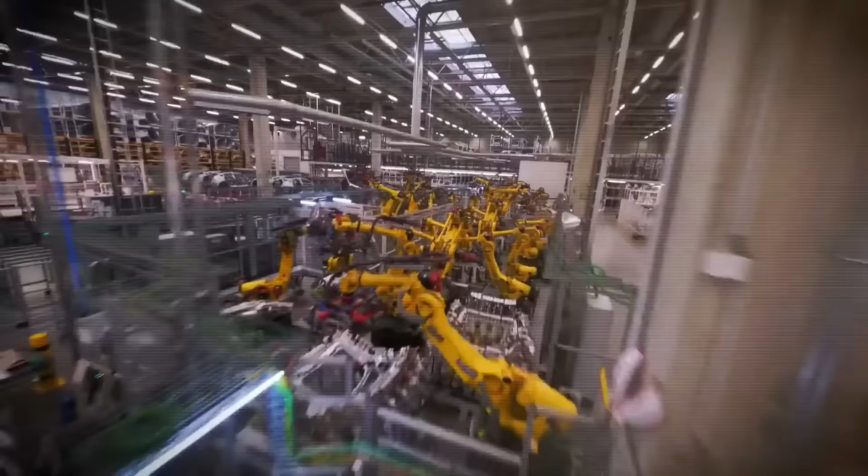Stop looking at the road. Stop staring at the Cybertruck. You think you're watching a car company at work? You're hallucinating. What if I told you the vehicles rolling off the line today are just Trojan horses? Decoys designed to distract you while the real weapon is assembled in the dark. You see the metal, you miss the monster.

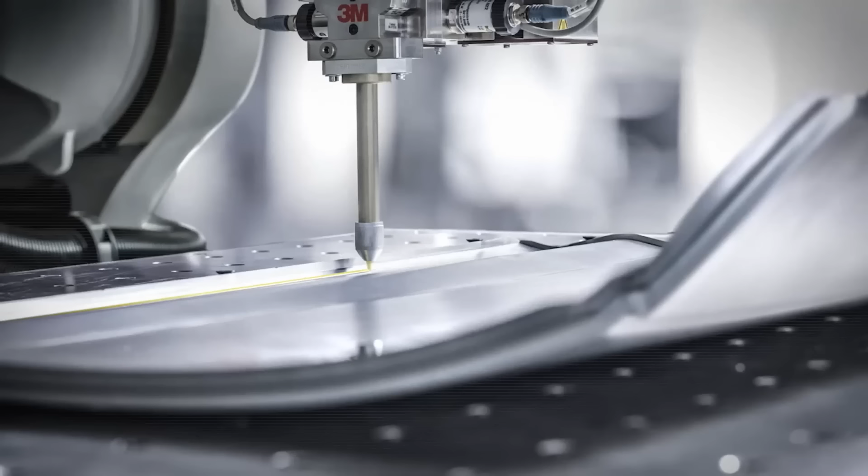It's late 2025. The legacy giants are bleeding billions, desperately trying to copy the Tesla of yesterday. They're tracing blueprints for an engine that doesn't matter anymore. Because while they were fighting for market share, Elon Musk wasn't just building a better car. He was building a machine to end the concept of a car company entirely.

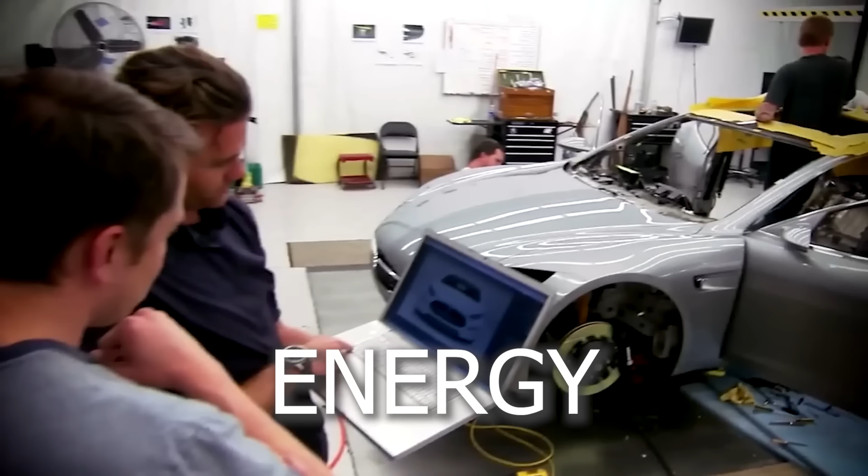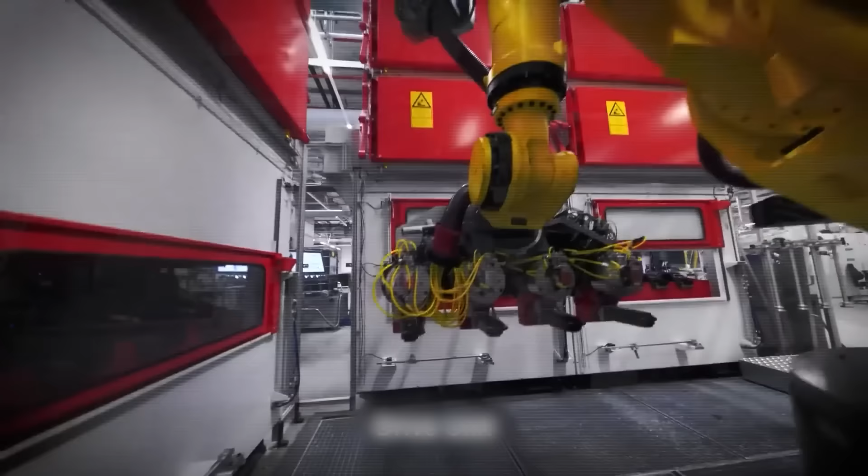We aren't talking about transportation anymore. We are talking about the total rewiring of reality, labor, energy, the very physics of how things are made. 5 hidden technologies, 5 keys to a kingdom the competition can't even see yet. This isn't an update. This is an extinction event for the old guard. You want to survive the shift? You need to understand the blueprint.

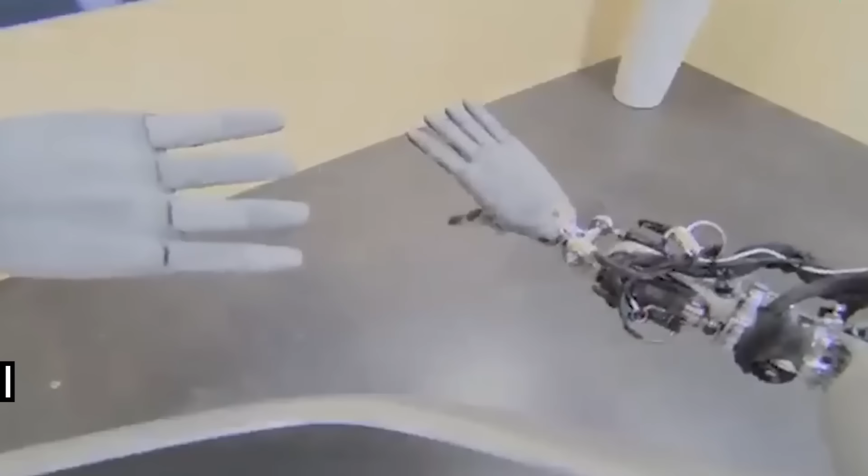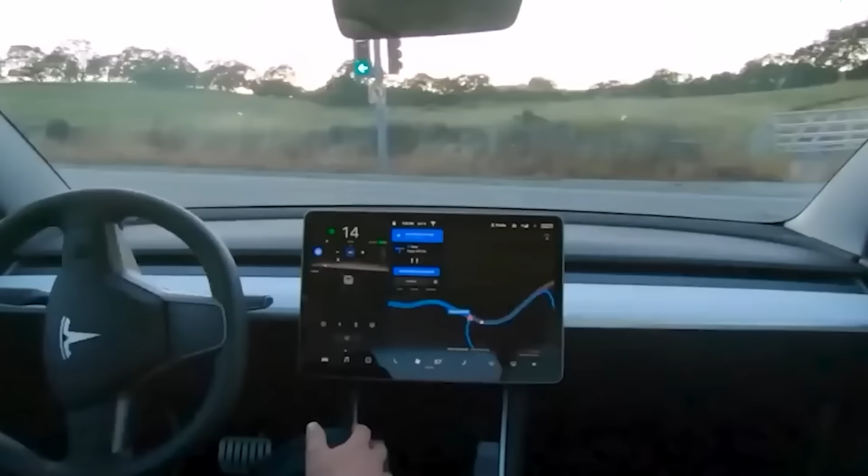Fourth, end-to-end AI, the brain that finally unlocks the robo-taxi. And fifth, Optimus, the humanoid that takes that intelligence and learns to walk. Alone, they disrupt. Together, they dominate. A fortress built to secure an insurmountable lead. Today, we deconstruct the stack, how it works, why it matters, and how this convergence changes everything.

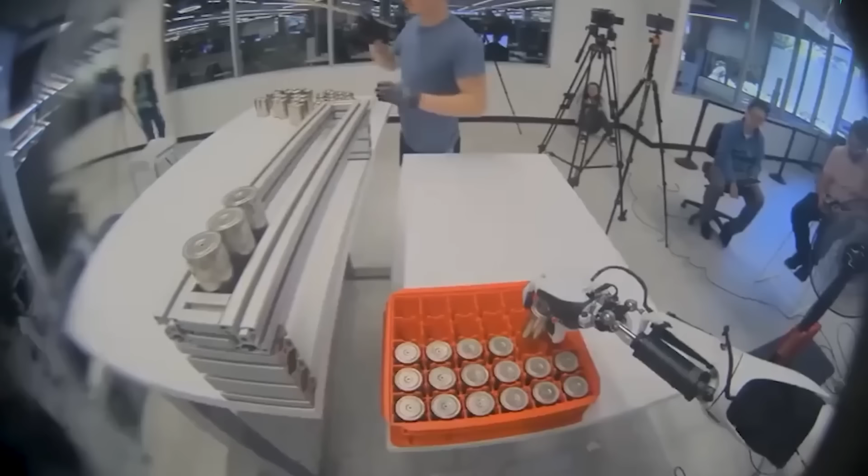Welcome to Dravexa. You need to understand, the deadliest weapon in Tesla's arsenal isn't a car, it's the factory. You've heard the mantra, the machine that builds the machine. But with the next-gen platform, that vision stops being a soundbite and starts being a reality. They call it Unboxed. For 100 years, Henry Ford's shadow ruled the floor.

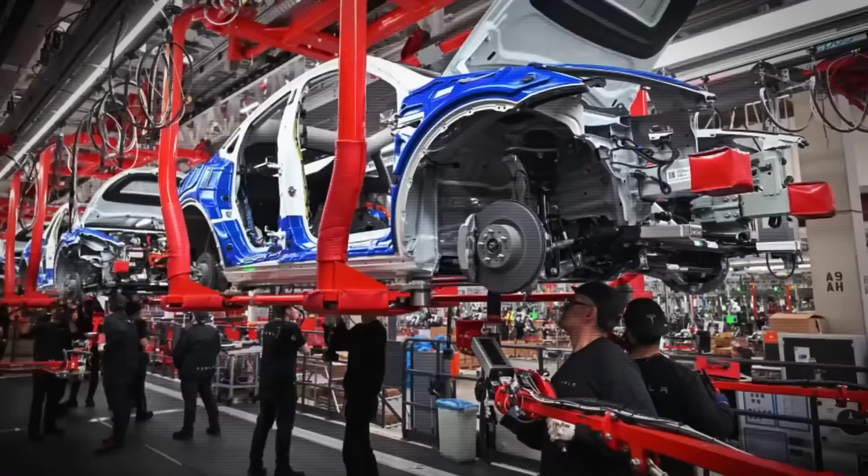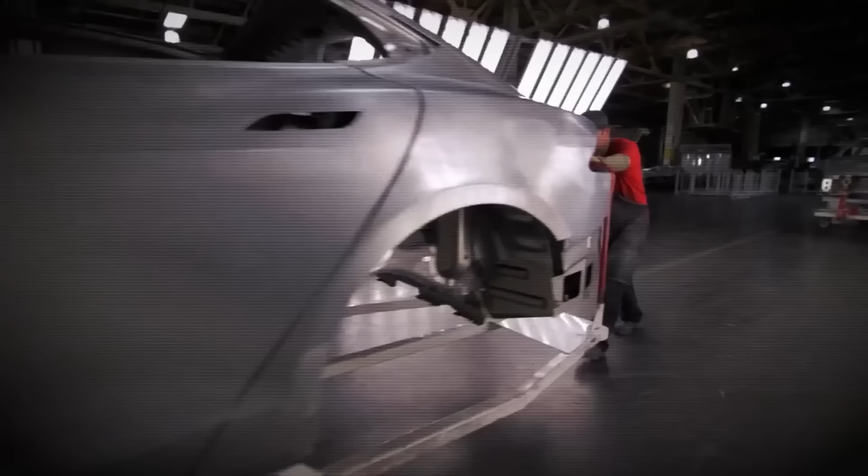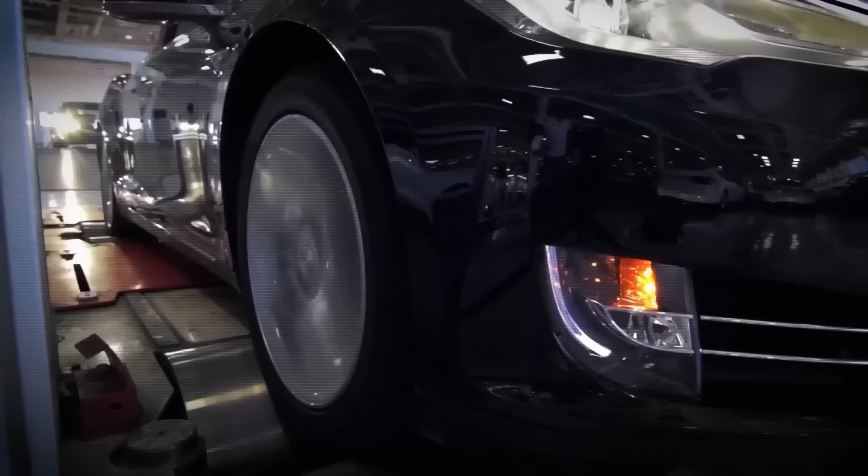The linear line, the body in white creeping down a single track, a swarm of robots and humans performing a cramped, clumsy dance, adding parts one by one. But that rhythm is broken. Think about it. The whole line is shackled to its slowest step, a total bottleneck. Workers fighting for space, diving inside the frame, wrestling with wires. It's inflexible. Retooling is a nightmare. It's slow, it's heavy, and frankly, it's obsolete.

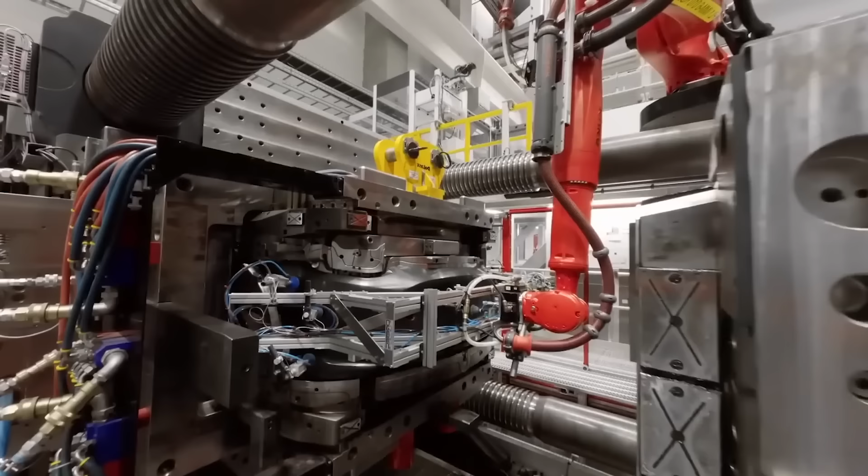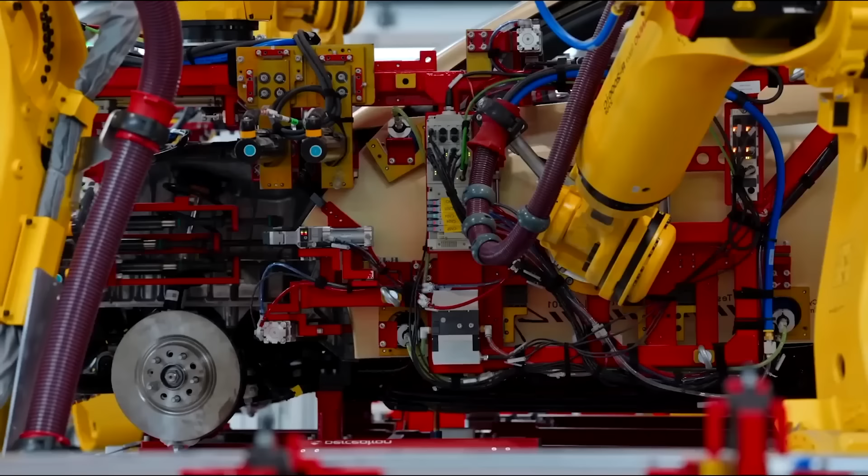So Tesla's unboxed method throws that entire 100-year-old concept in the trash. Instead of one long, slow line, the factory is organized into parallel process chunks. Think of it like building a Lego car. You'd never build the frame first and then try to stuff the little driver through the tiny window. It's absurd. You'd build the floor. You'd build the front block, the rear block, the cabin, and then, at the very end, you just click them all together. This is exactly what the unboxed process does.

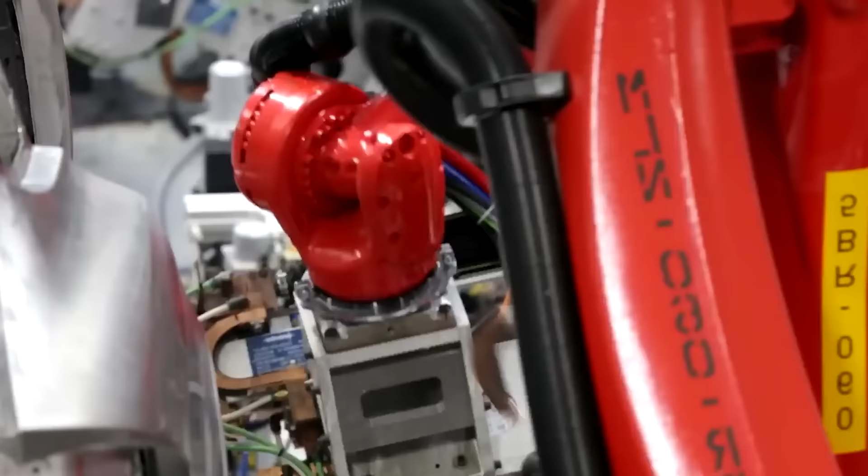Imagine this. Over in one corner of the factory, that massive front Giga casting is getting its motor, its suspension, its steering. At the exact same time, in another corner, the rear Giga casting is getting its motor. And simultaneously, the central floor pan, which is the 4680 structural battery pack, is being prepped.

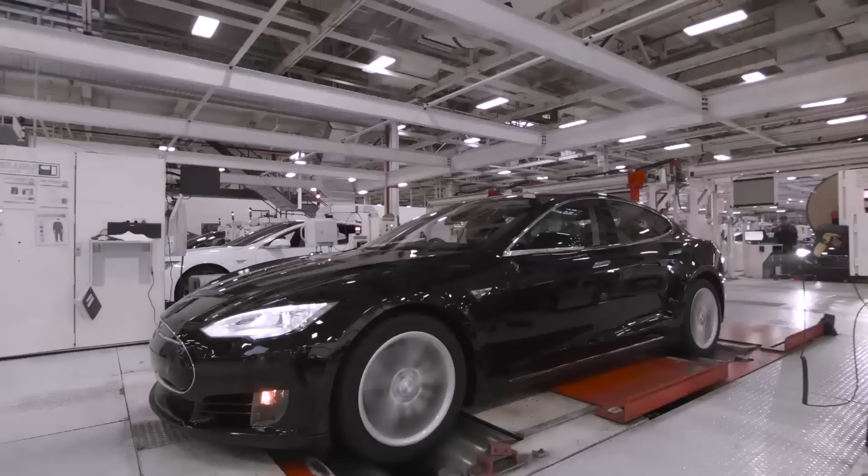The real magic? Open access. Workers and robots have a full 360-degree attack. You want to install a dashboard? It's simple. There's no roof. There are no doors in the way. It is massively faster. It's more ergonomic. Then, and only then, do these huge pre-assembled, pre-tested modules meet. The front, the rear, the painted side sections. They're all joined to that structural pack in one final step.

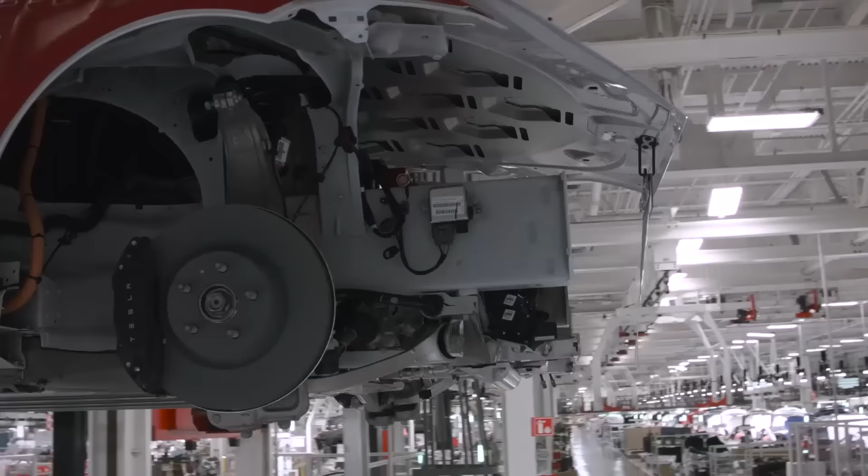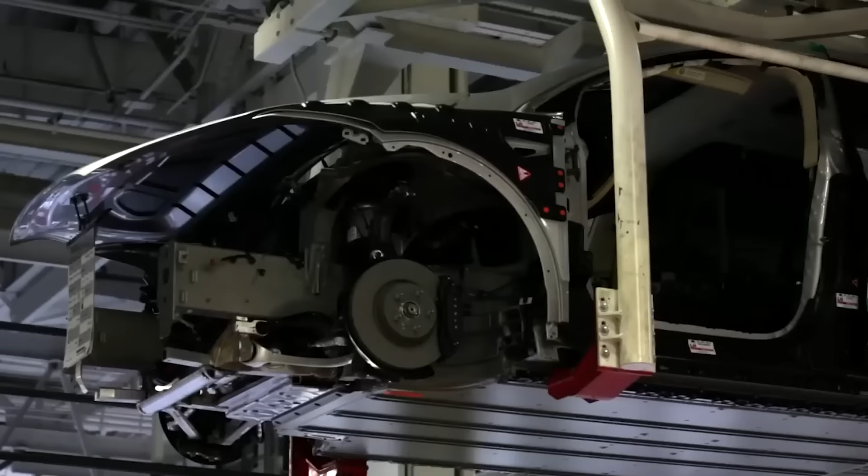The results? Tesla claims a staggering 40% reduction in factory footprint, a 25 to 30% increase in production speed, all while slashing the cost to build the factory in the first place. This isn't just an improvement, it's a new paradigm.

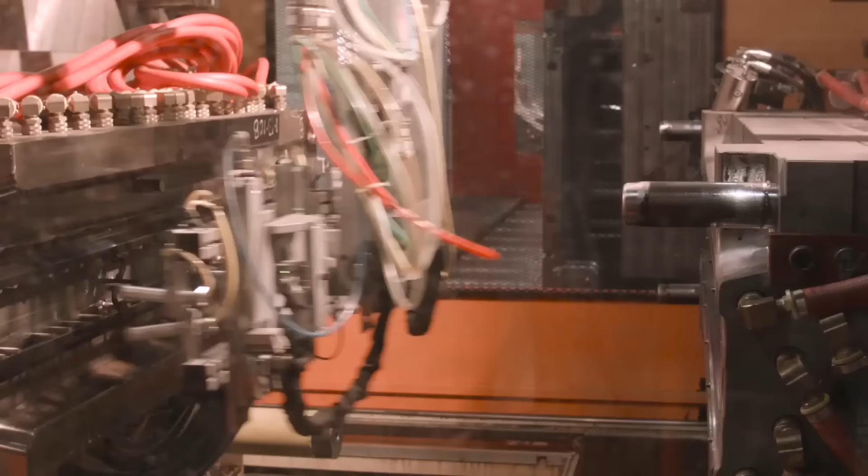This is the only way Tesla can realistically build that $25,000 car at high volume and, most importantly, at high margin. But here's the secret. That unboxed method, that whole Lego block strategy, is only possible because of another Tesla innovation, Giga casting. You have to understand, traditionally, a car's underbody is a complex puzzle. We're talking 70, 100, even more different stamped metal pieces.

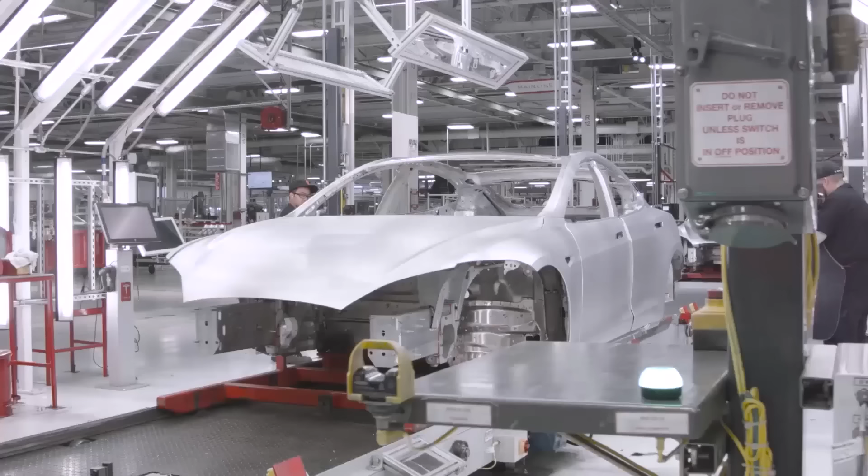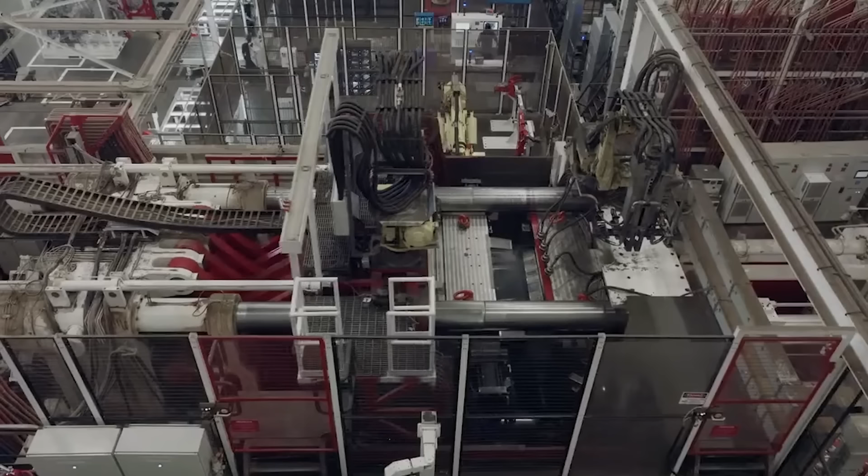All of them have to be painstakingly welded together by a massive body shop of hundreds and hundreds of robots. Tesla's Giga press, a machine the size of a small building, throws all that out. It casts the entire front or rear underbody as a single piece of aluminum. Just that one innovation, it eliminates over 300 robots.

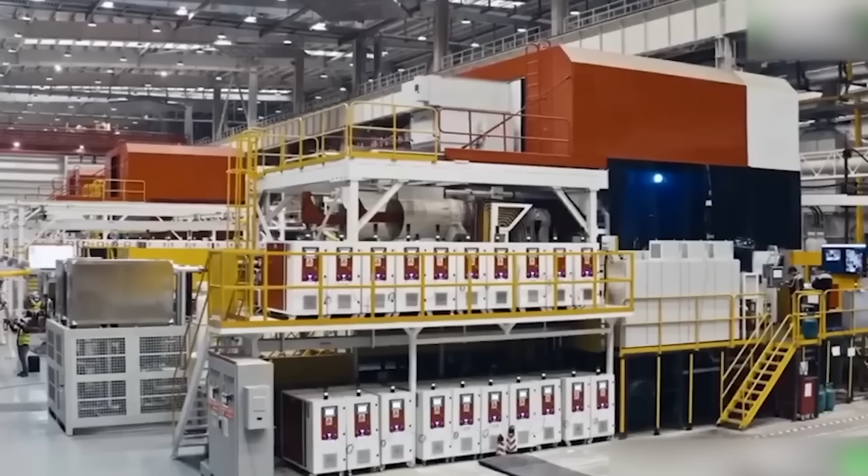It erases 600+ welds. It frees up a massive amount of factory space. The resulting part is stronger, it's lighter, and it is critically, unbelievably faster and cheaper to make. That single Giga part, that is the Lego block that the unboxed method is built on.

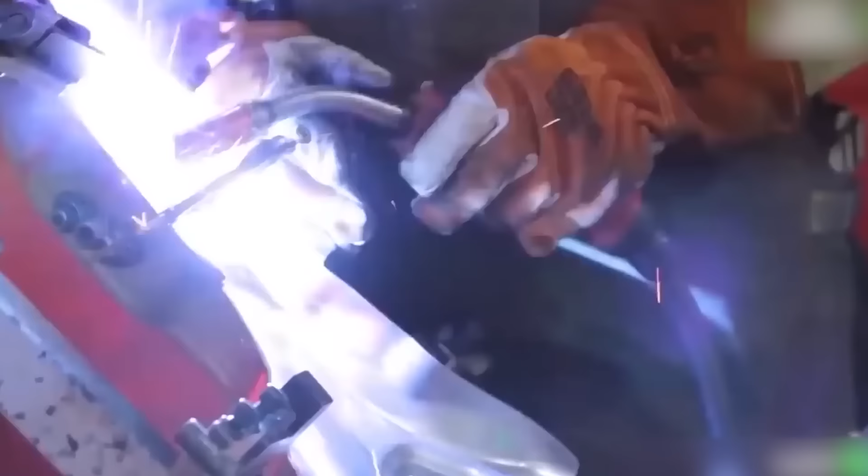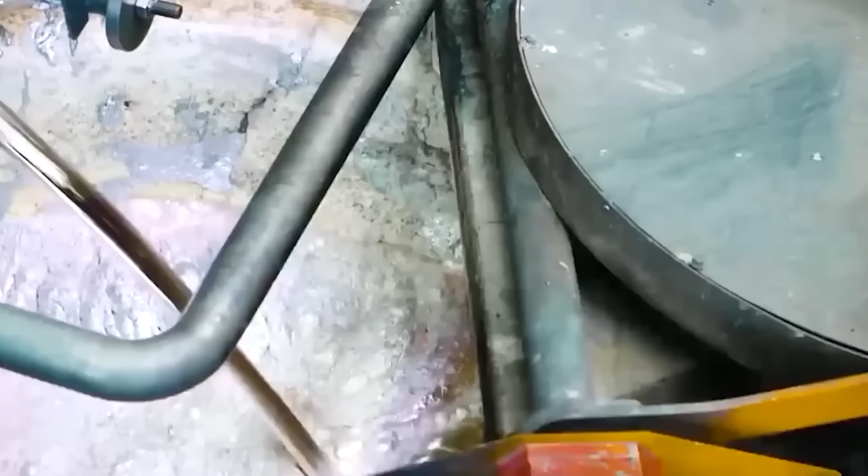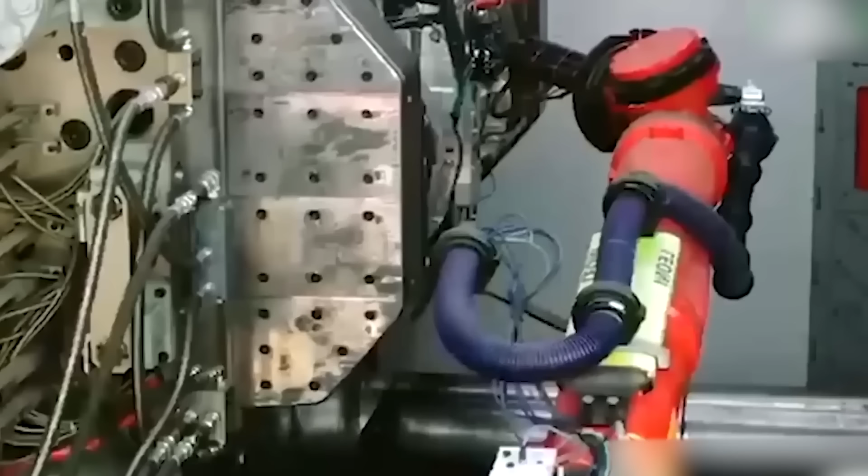While competitors are just now scrambling to order their first Giga presses, they're already years behind, because Tesla isn't just ahead in the machine, it has a multi-year lead in the metallurgy, the secret sauce, that special aluminum alloy that is strong, not brittle, and perfectly castable at high speed. That is a deep, costly moat. And for legacy automakers with their billion-dollar investments in those old-world body shops, crossing it might be impossible.

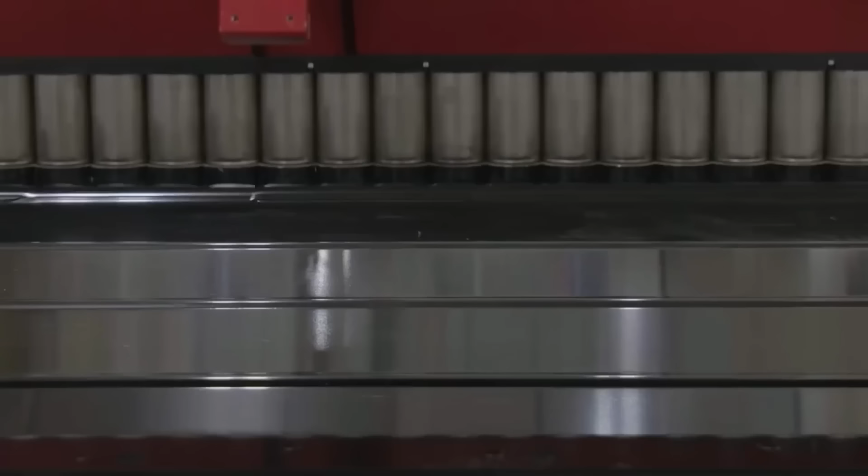So, you have the unboxed skeleton. Now, you need a nervous system. And for over 60 years, the entire auto industry has been locked into a dying standard, a 12-volt system. You have to understand, this 12-volt standard was designed for simple machines, a car with lights, a radio, and maybe power windows. But today, your car is a supercomputer on wheels, and that 12-volt system, it's become a critical bottleneck.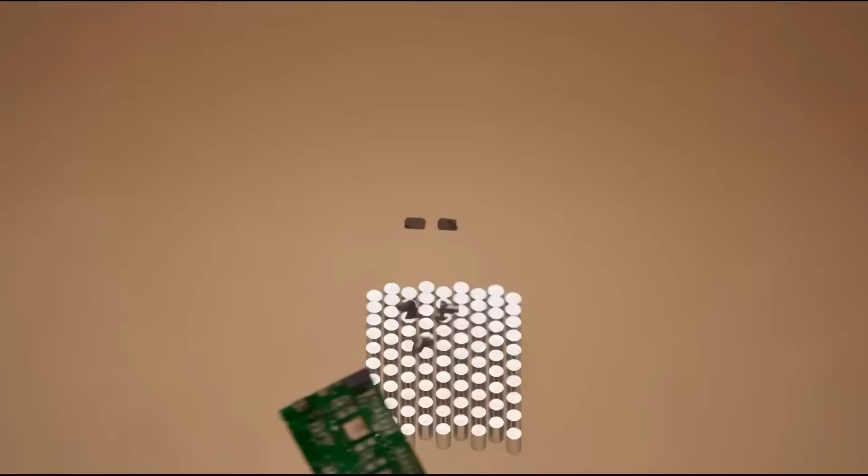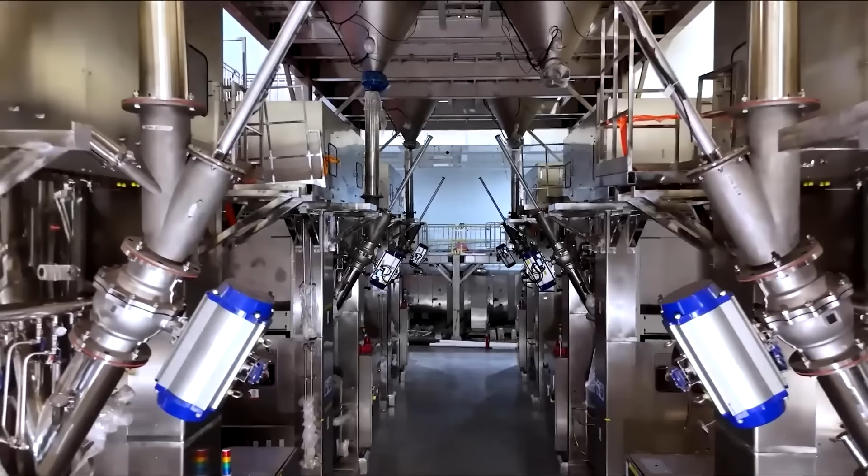The problem is just basic physics. You've heard the equation, power equals voltage times current. If you want more power, say for faster moving seats, a more powerful audio system, or the advanced steer-by-wire you see in the Cybertruck, you have to raise either the voltage or the current. And since the industry has been stuck at 12 volts, their only option was to drastically increase the current. The result? Thick, heavy, expensive copper wires to manage the heat and the load.

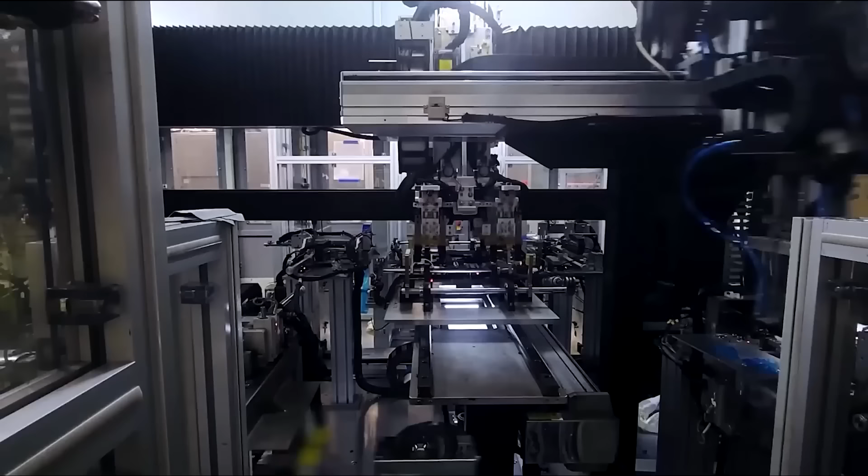We're talking about a wiring harness in a modern luxury car that can weigh over 50 kilograms. That's over 110 pounds. It's miles of copper. It's one of the most complex, costly, and manually installed parts in the entire vehicle. Worse, you hit a hard limit. You simply cannot run the high-power systems of the future on a 12-volt rail. Not efficiently, not safely. So, what does Tesla do?

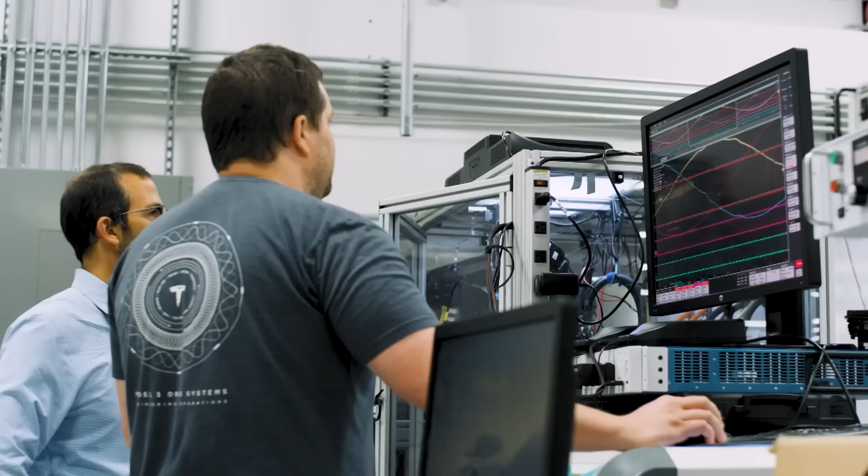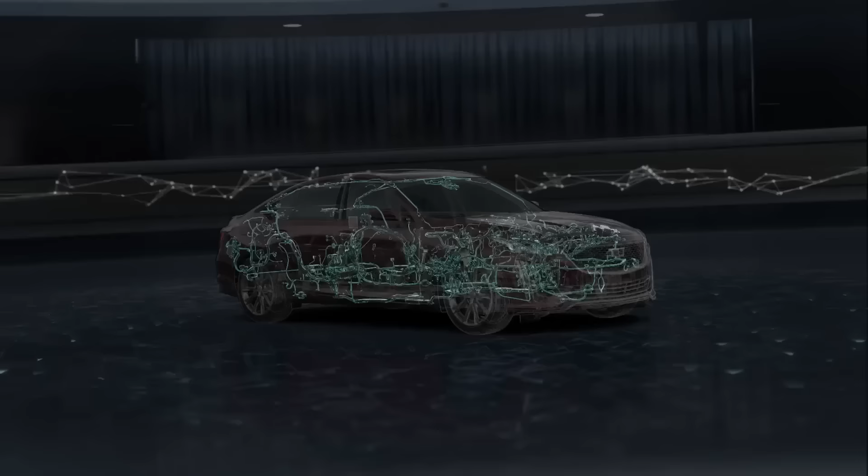They change the equation by moving to a 48-volt system, first in the Cybertruck and now standard on their next-gen platform. They flip the table. Think about it. To get the exact same amount of power, if you multiply the voltage by 4, you can divide the current by 4. That is a profound change. A 4 times reduction in current means you can use wires that are dramatically thinner, dramatically lighter, and dramatically cheaper.

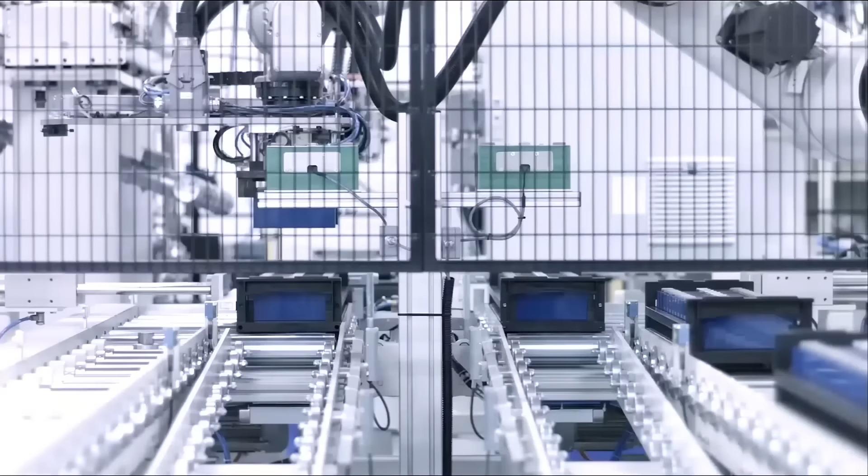And the power you lose as heat? That drops by a factor of 16. The Cybertruck's wiring harness is a fraction of the size of a normal truck's. This saves money, this reduces weight, which increases range, and it massively simplifies that unboxed manufacturing process we just talked about. It's the key that unlocks the Ethernet data bus, where a single cable can finally carry both power and data, destroying the one-wire per-function nightmare of the past.

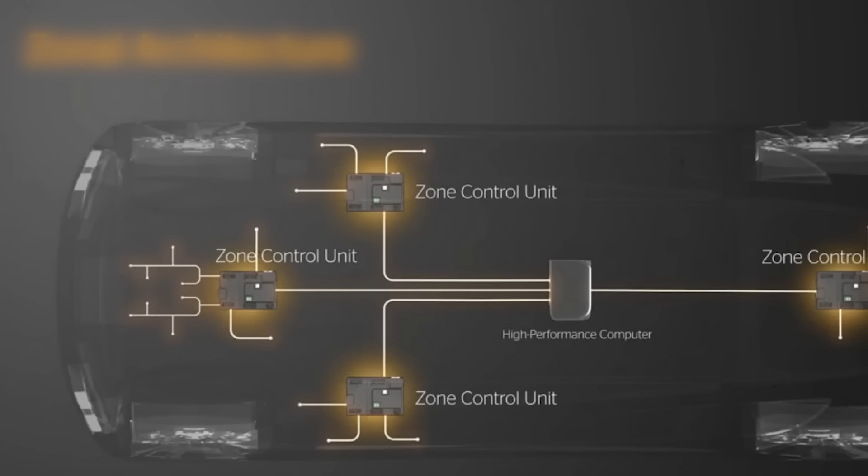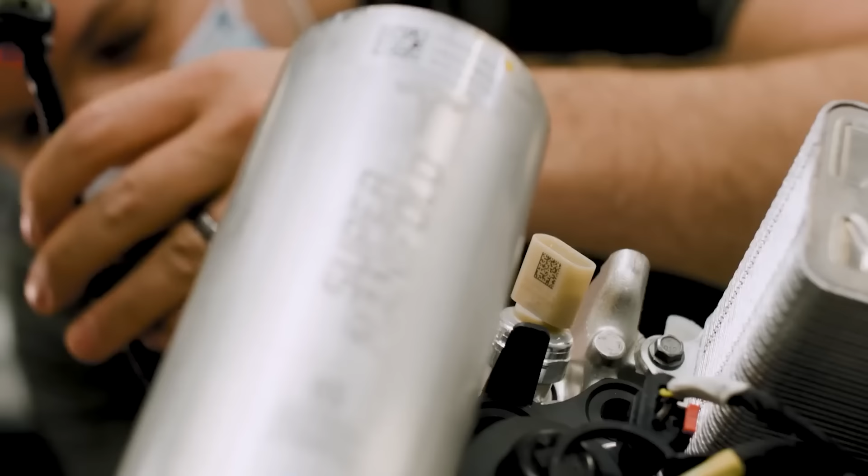This shift to 48 volts, it's not just an internal change, it is a shockwave to the entire global supply chain. For decades, companies like Bosch, Continental, and Denso have perfected the 12-volt world. All those window motors, the pumps, the fans, they are all 12-volt. By moving to 48 volts, Tesla is effectively making its entire parts list obsolete.

Suppliers now have to re-engineer, retool, and revalidate everything. A company like Ford or GM, they can't just switch. They are being held hostage by a supply chain that simply isn't ready. But Tesla? Because they designed so many of their own controllers, their own components, they can force the change. Their vertical integration lets them absorb the complexity. While their competitors, they're left tethered to a 60-year-old standard, adding yet another layer to Tesla's massive manufacturing and cost advantage.

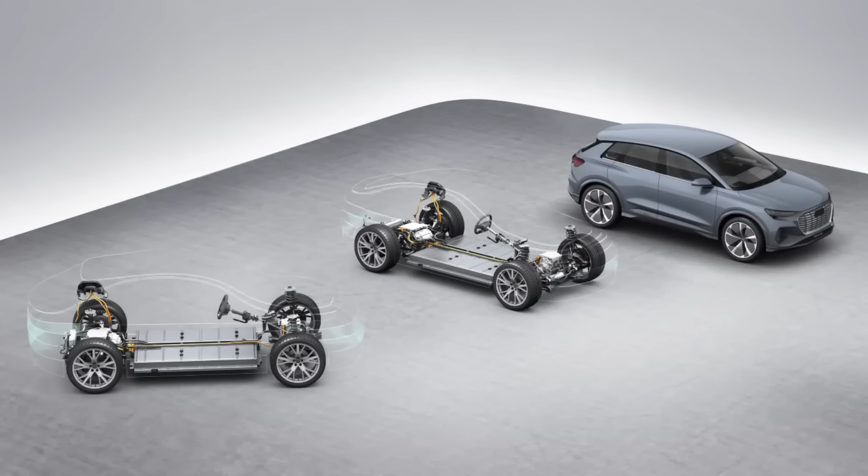So, your factory is fast, your car's nervous system is efficient, but you still have a massive problem. Energy. The car still needs a breakthrough to be affordable for everyone. And that breakthrough is the 4680 battery cell. The name? It's just the dimensions.

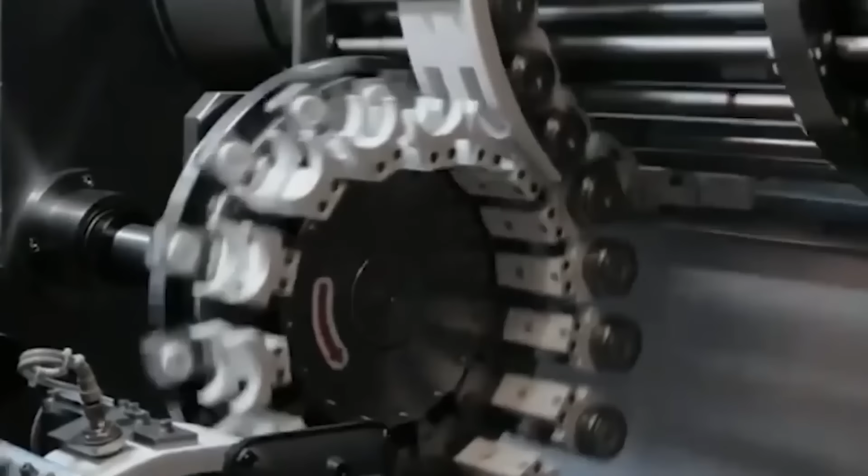46 millimeters wide, 80 millimeters tall. But its design? That is the revolution. You see, a traditional battery, like the 2170 cells in a Model 3, has two little tiny tabs at the ends. All the energy has to fight its way in and out through these two tiny bottlenecks. This creates a traffic jam. It creates massive heat, especially when you're charging fast or flooring it.

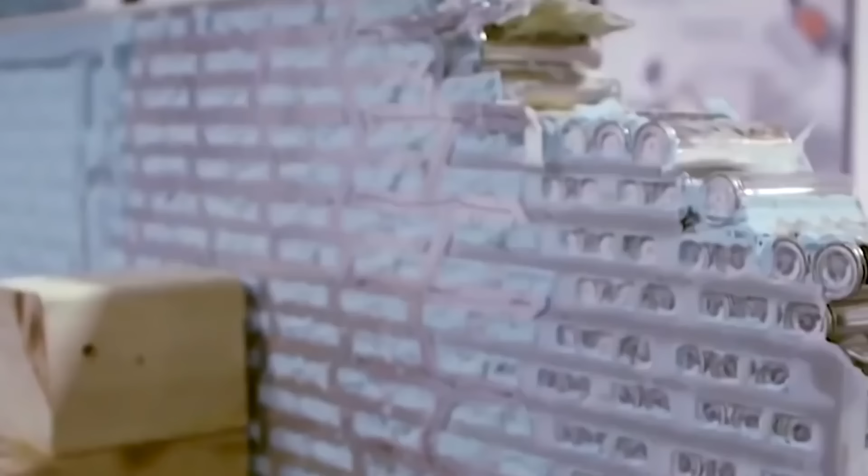The 4680's tabless design is pure genius. Instead of a tiny tab, it uses a shingled spiral. This means the entire edge of the battery's internal foil is the connection. The path for the energy is suddenly short, wide, and clear. This one change fundamentally rewrites the cell's properties.

First, less heat, drastically less. Second, faster charging. With no heat to manage, you can flood the cell with power. And third, more power instantly. This is the secret to Plaid-level acceleration. But that isn't even the real story.

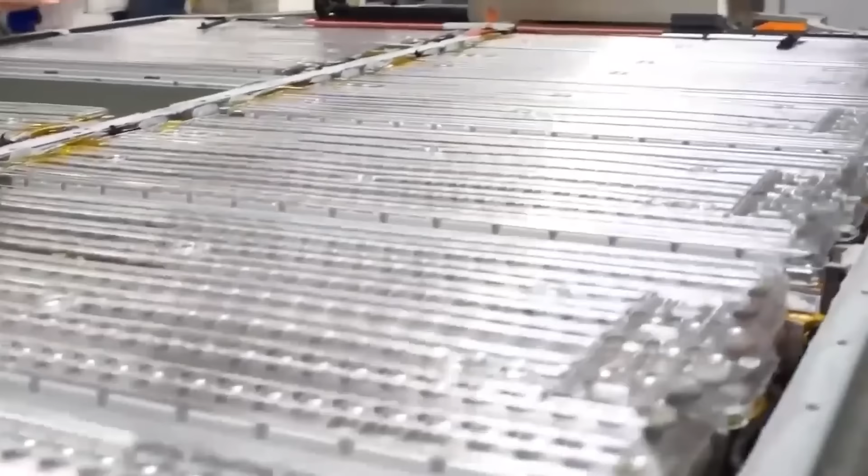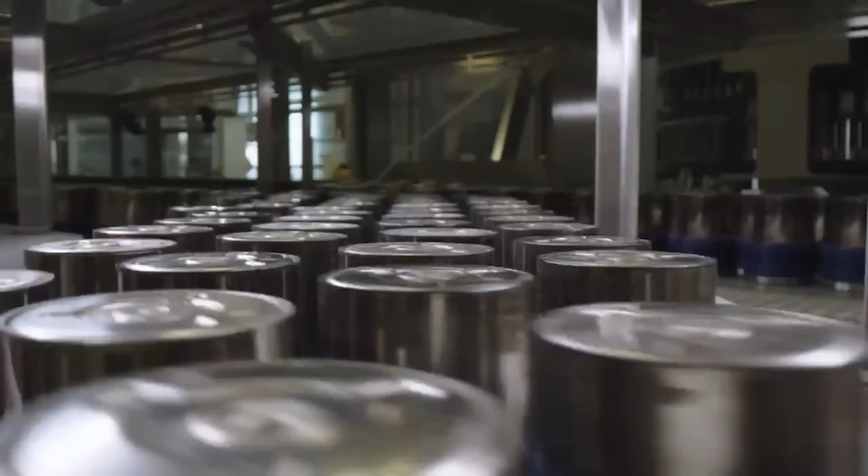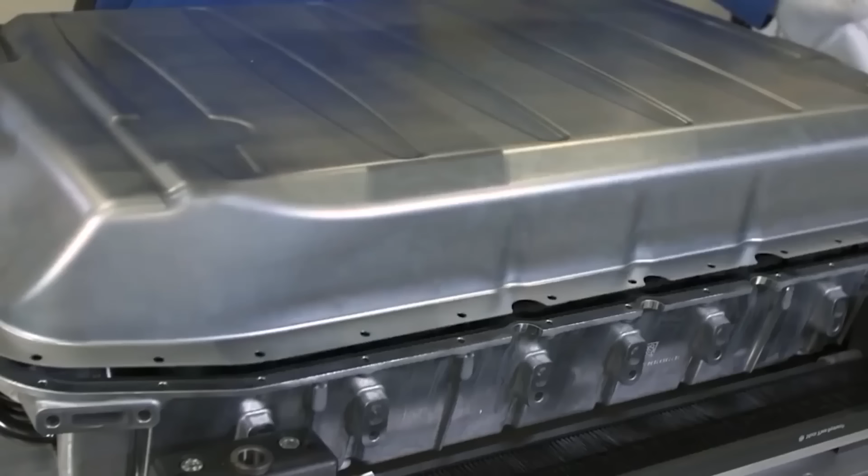The manufacturing is the true change-everything moment. It's a process called dry battery electrode, or DBE. For 50 years, everyone has made batteries the same way, a wet slurry. You mix the battery materials into a toxic wet paste, you paint it onto a foil, and then you run it through massive 100-meter-long energy-blasting ovens to dry it out. Tesla's DBE process stamps the active material dry directly onto the foil. No solvent, no water, no drying.

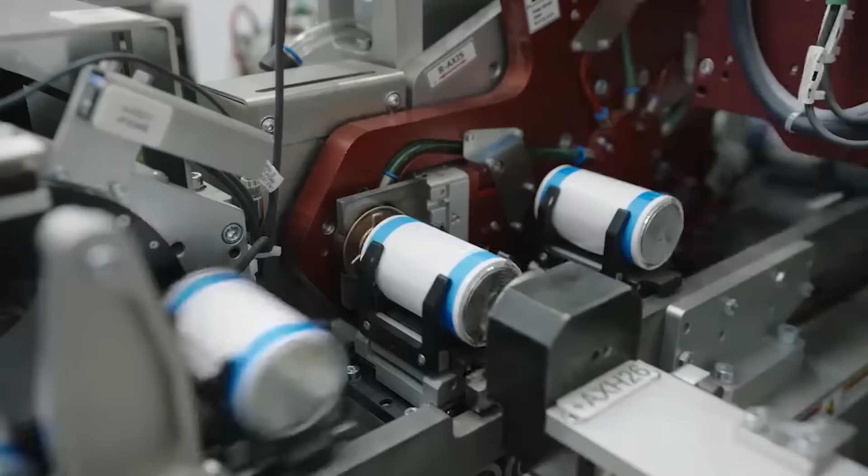Now, you need to understand how impossibly difficult this is. It is the holy grail of battery manufacturing. It's the main reason the 4680 ramp-up was so slow. The old wet method is like painting a wall. It's slow, but the paint spreads evenly. The dry method is like trying to spread a layer of fine dust perfectly evenly on a wall, make it stick, and do it at lightning speed. It's like trying to compress fine gravel into a perfect mirror.

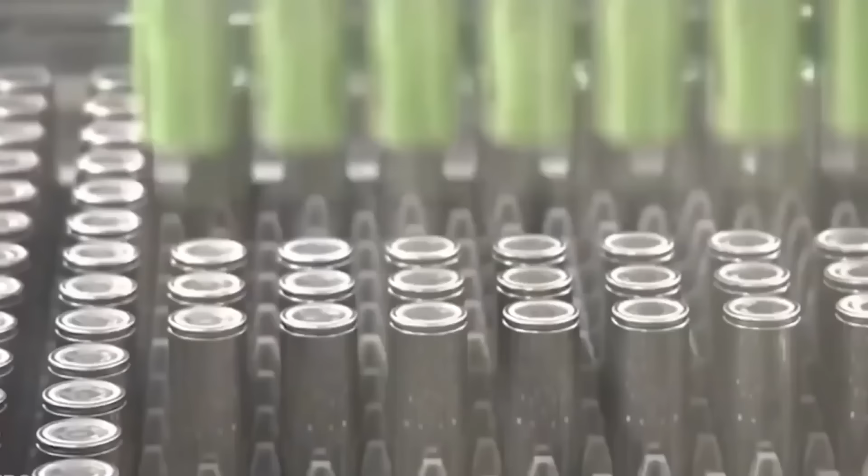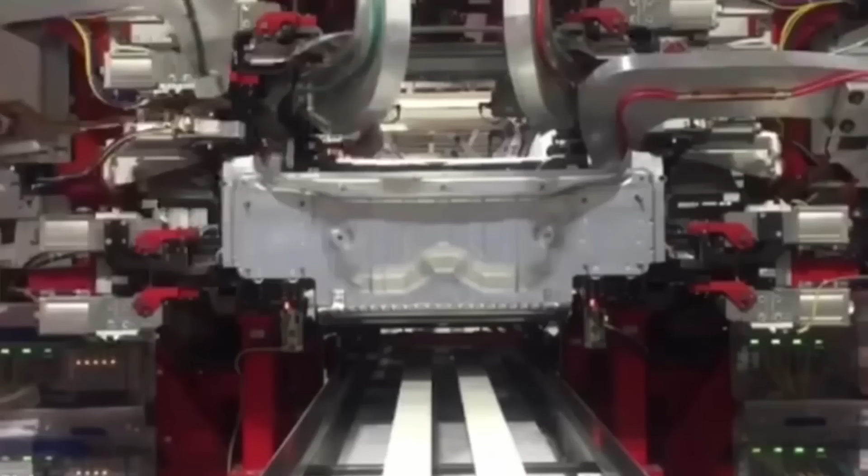And as of 2025, Giga Texas is finally scaling it. This process doesn't just promise to cut factory footprint and energy use by 10 times. Internal reports are already clear. The 4680 cell is already cheaper for Tesla to make than anything they can buy from suppliers. This is the final piece of the puzzle.

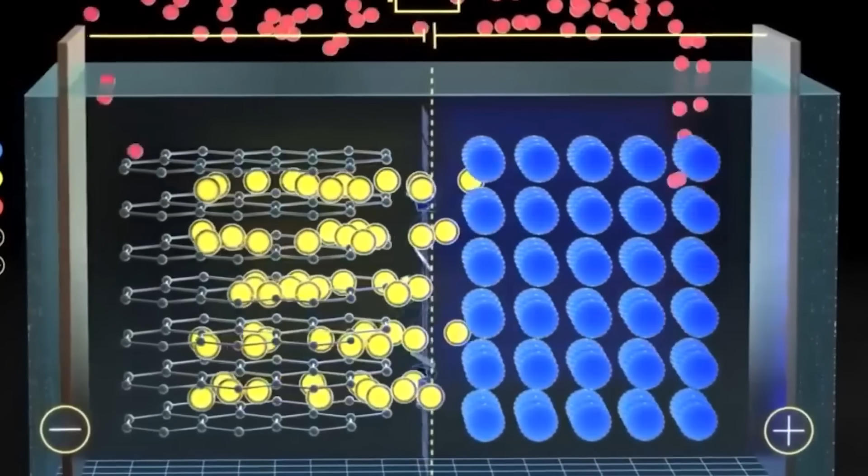You combine this cheap, powerful cell with a structural pack where the battery is the floor of the car, saving 370 parts, and you have the key. This is the only way the $25,000 car is possible. It's the only way the Tesla Semi works. So, the 4680 cell is the heart, but now we talk about the brain.

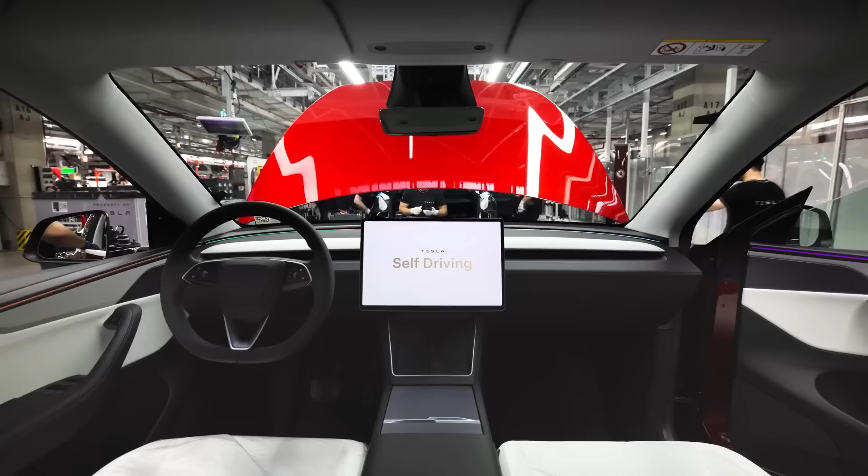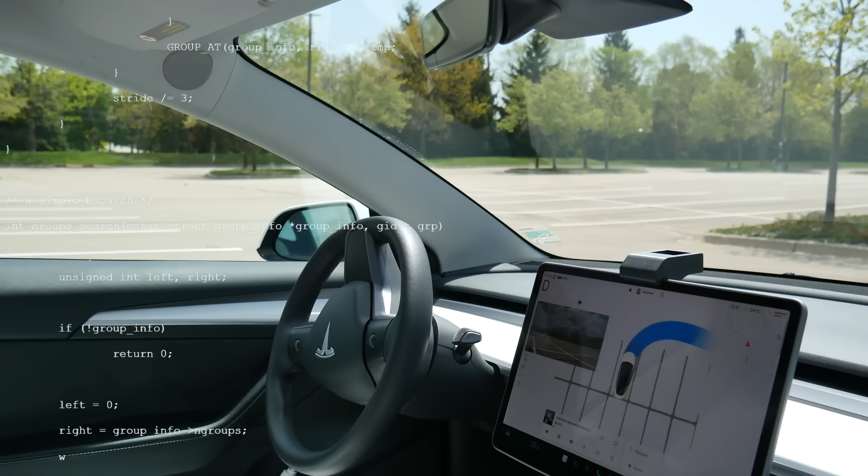Full self-driving. For years, FSD has been this promising, controversial, coming-soon beta. But with version 12, it went through a change as fundamental as the jump from a flip phone to a smartphone. You see, the old way, FSD 11 and everything before it, was a mountain of code. It was a complex, human-written stack. Hundreds of thousands of lines of C++, a giant, fragile rule book.

If the camera sees a red light, then apply the brake. If a car is merging, then calculate its trajectory. If it's a stop sign, but there's a pedestrian and the cross-traffic is clear. This approach is brittle. It's impossible for a human to write a rule for every edge case the real world can throw at you. A stop sign hidden by a tree. A construction worker waving you through a red light. This is why true self-driving has been almost solved for a decade.

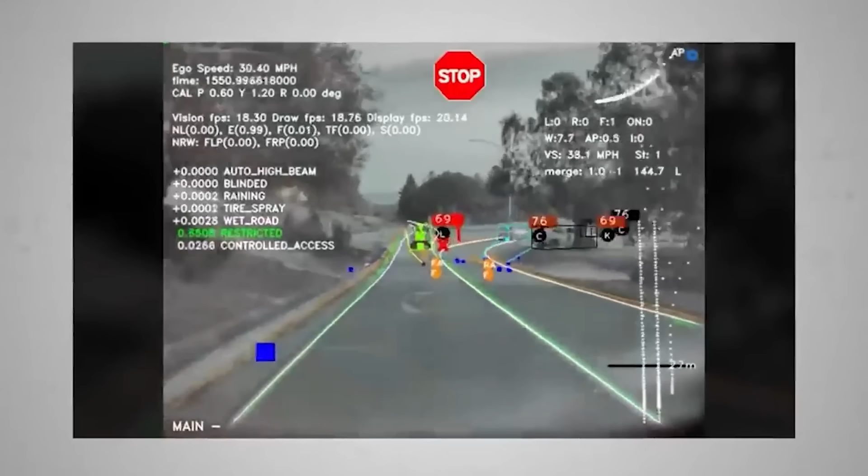So with FSD V12, Tesla did the unthinkable. They deleted it. They deleted over 300,000 lines of that C++ code, and they replaced it with a single end-to-end neural network. This new system was not programmed, it was trained. Tesla fed it millions of video clips of its best human drivers and essentially told the AI, "Watch this. Learn to drive like this."

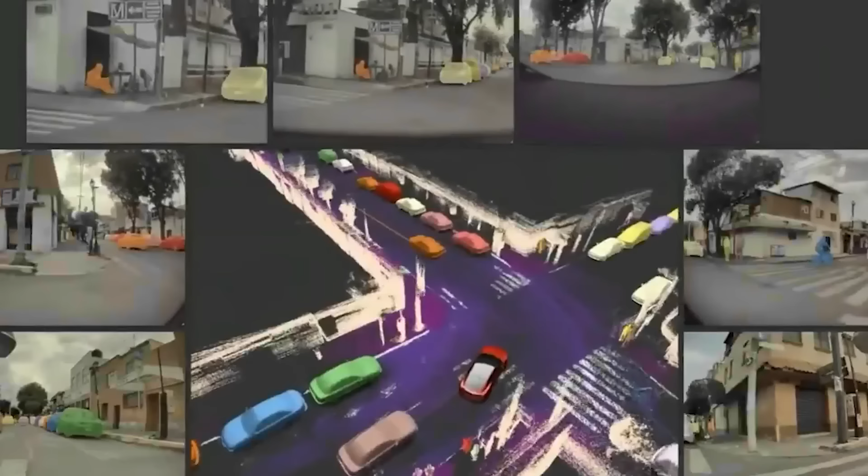And it did. Now the system takes in raw video from the cameras and outputs steering, acceleration, and braking commands. Photons in, controls out. This is the ChatGPT moment for physical AI. The AI is predicting the next most likely driving action based on all the video it has ever seen. It learned how to creep at an unprotected left turn by observing humans do it, not by reading a rule.

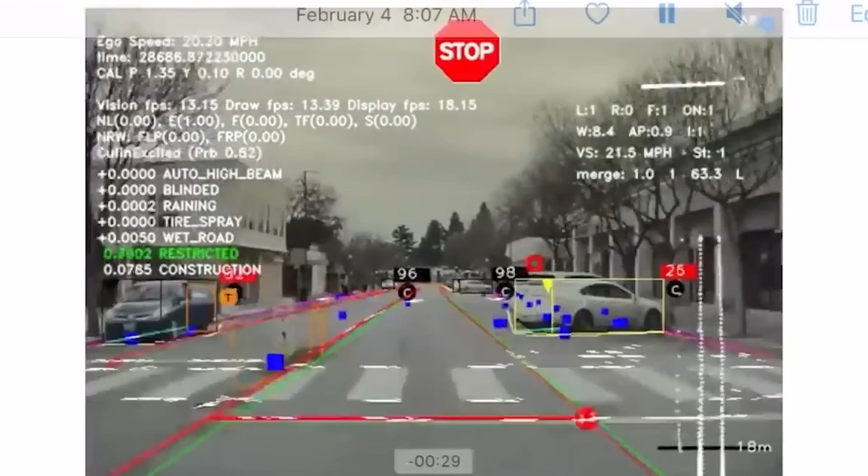And this system is infinitely scalable. To make it smarter, you don't hire 1,000 engineers to write more if-then rules. You just curate new, tricky video scenarios, add them to the training set, and recompile the brain.

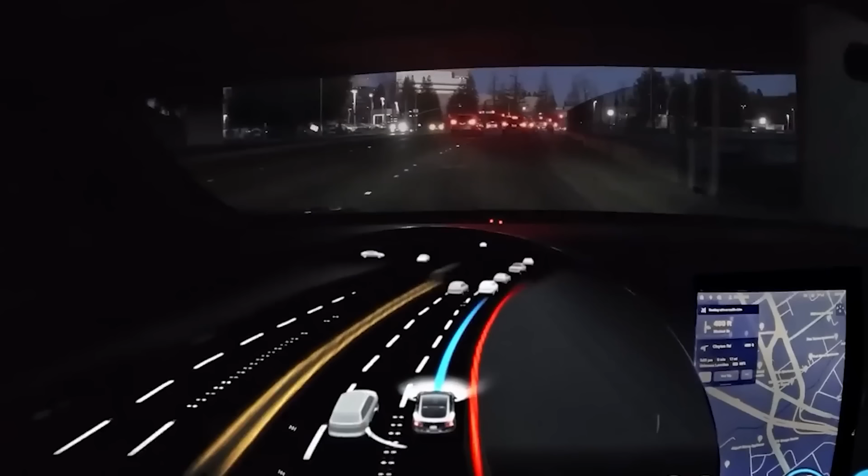But an AI is only as good as the data it's fed and the computer that feeds it. First, the data. With over 6 million FSD-capable cars on the road, Tesla has the largest data-gathering operation in history. When a driver takes over, the system flags that video clip, that difficult, snowy left turn, and uploads it to the data factory.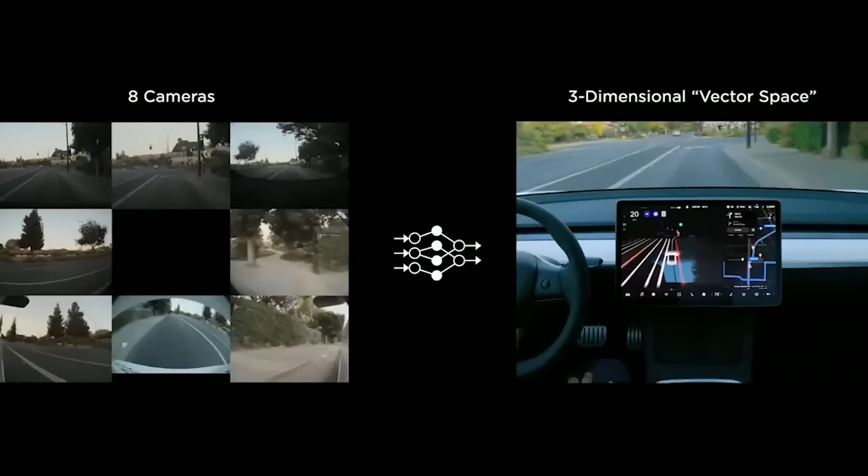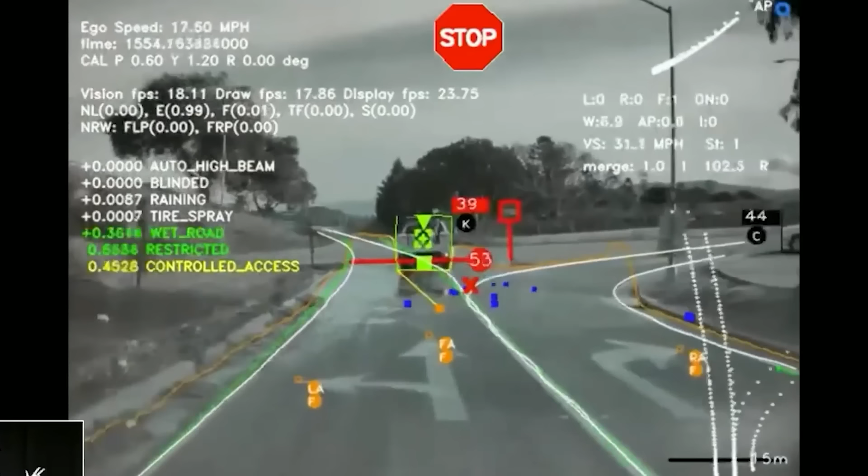Second, the computer. You've probably heard of Dojo, Tesla's custom supercomputer. But here's the Dravexa level update, because as of late 2025, the game has already changed. Tesla realized that having one giant separate computer for training, Dojo, and a different chip in the car for driving was inefficient. It was a bottleneck.

So, they're pivoting. They are now focused on a unified AI architecture. New chips called AI5 and AI6 that will do both. They are building their new training supercomputer, what you could call Dojo 3, out of the same powerful chips that will be in their future cars.

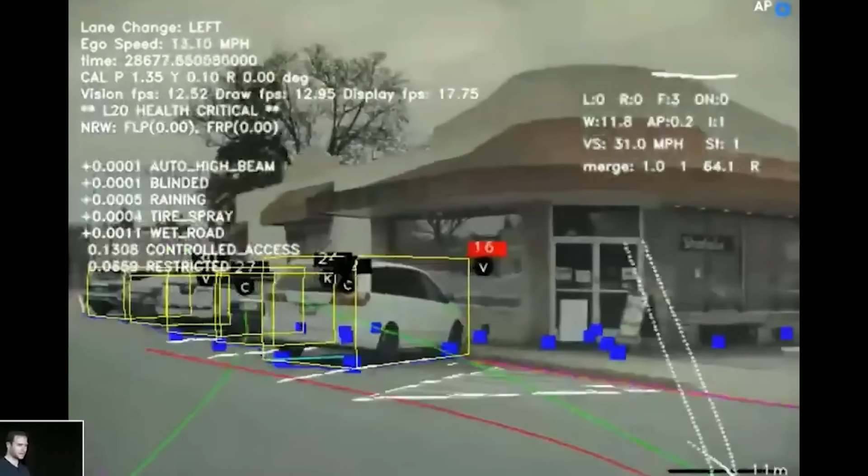This creates the ultimate flywheel, a doom loop for competitors. Better AI leads to a better FSD. More people use it, more data is collected, the AI gets better, faster, and their new unified computer spins this flywheel at a speed and a cost no one else can match. This is the only path that plausibly solves full autonomy.

And when it does, it unlocks the single most disruptive economic force of all, the robotaxi. A $25,000 car that can drive itself 24/7 and earn $30,000 a year. That isn't a car anymore. It's an asset, and it's one that will change our cities and our world forever.

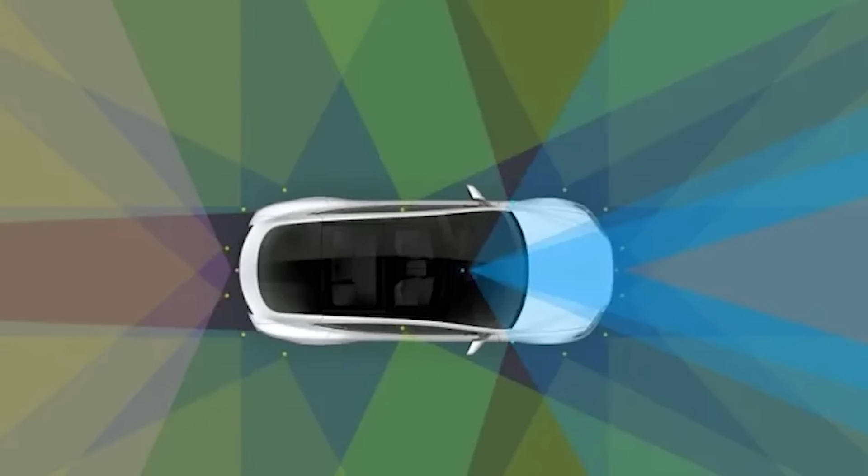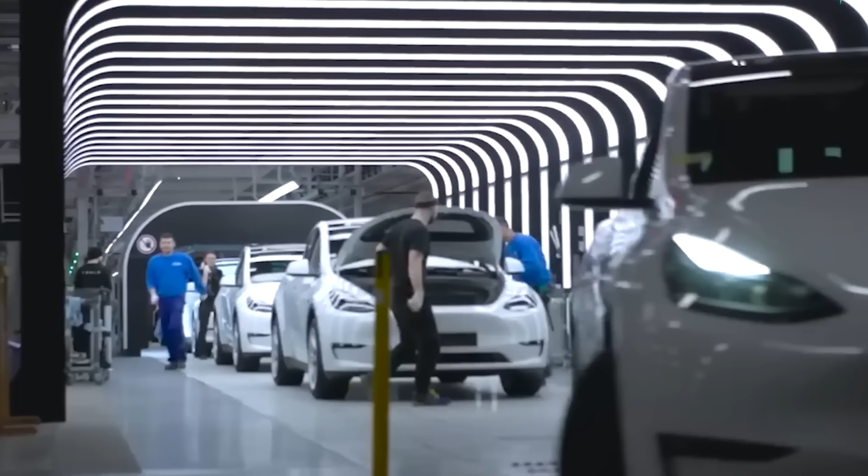So, what do you do with the world's most advanced real-world AI? An intelligence trained on billions of miles, running on custom silicon, powered by the densest batteries on the planet? You don't just leave it in a car, you put it on legs. This is Optimus. You have to understand, this isn't a side project. It isn't a gimmick. It is the logical conclusion of every technology we've discussed, combined.

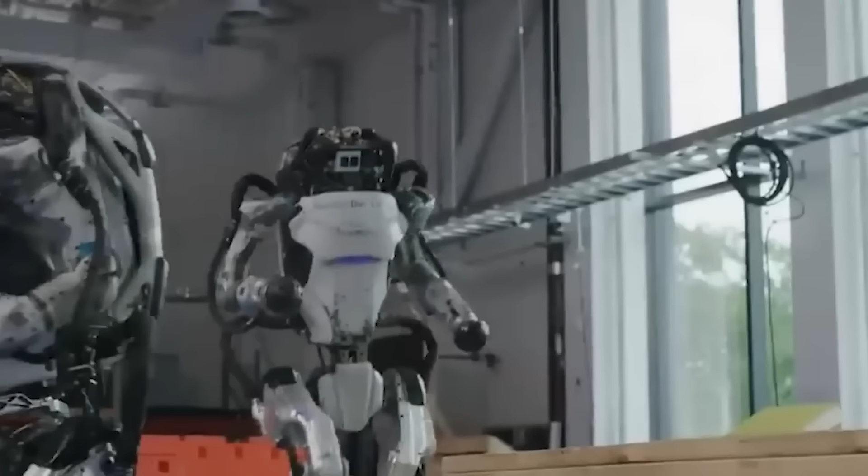Think about it. The brain: Optimus runs the exact same neural net as the fleet. The AI that learned to survive a chaotic street can easily master the factory beat. It just swaps car physics for human physics: walking, balancing, grasping. The power? It runs on the 4680 architecture. The manufacturing? It's built with the same unboxed, Giga-casted principles.

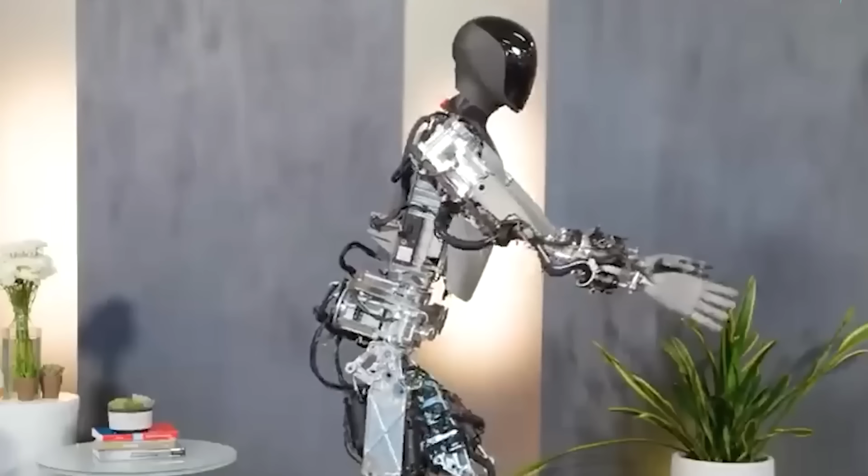And the progress is staggering. Gen 1 could barely stand, but Gen 2.5 has hands so tactile, so precise, they can handle an egg without breaking the shell. And this isn't a simulation. These bots are in the factory right now, taking the jobs that are boring, unsafe, or repetitive. But that's just the start.

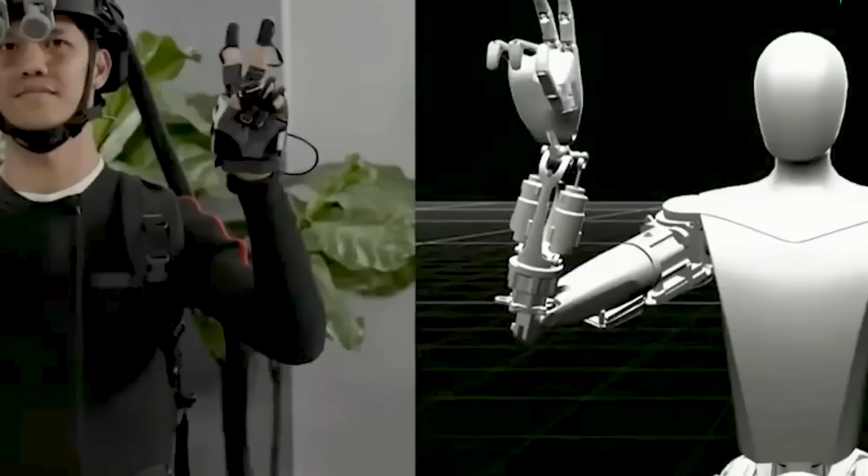You might ask, why a complex humanoid? Why not just put it on wheels? The answer reveals the true scale of the ambition, because the world isn't built for wheels, it's built for us. Our stairs, our doors, our tools, they are designed for 2 legs, 2 arms, and 5 fingers.

A specialized robot is stuck in one place, but a humanoid like Optimus can work in any space. It can install a door today, stack boxes tonight, and go home to wash your dishes by the morning light. You don't redesign the world for the bot; it fits into the world you've got. This isn't just a new product, it is an entirely new, programmable labor force. With a potential demand of 20 billion units, this is an economic shift larger than the car, the PC, and the internet combined.

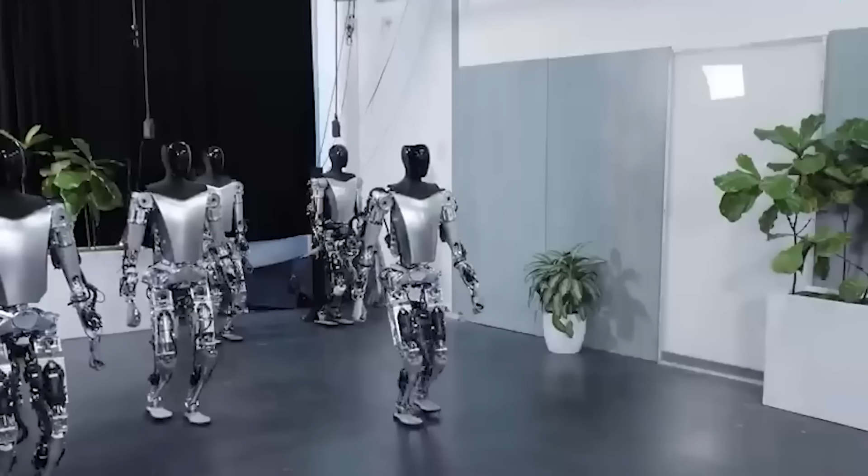Because when you zoom out, you see the truth. Tesla's tech isn't a list of parts, it is a single vertical art. The GigaCast factory builds the cheaper car. The car is the vessel for the 4680 star. The battery powers the FSD brain. And that brain's final form isn't a vehicle at all. It's the mind of Optimus.

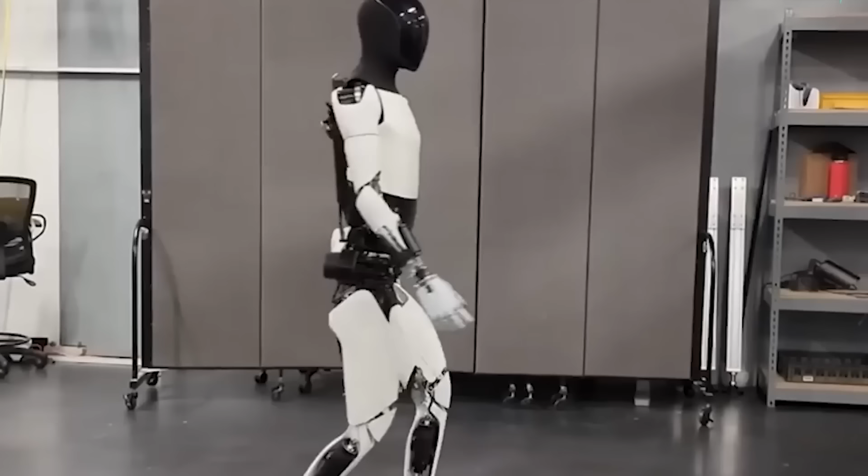You see, each piece is a lock, and the next piece is the key. They aren't just selling you an EV. They are building the manufacturing, the energy, and the AI infrastructure to power a new industrial reality. Whether this colossal gamble succeeds, and whether we are ready for the shock, is the multi-trillion-dollar question of our time.